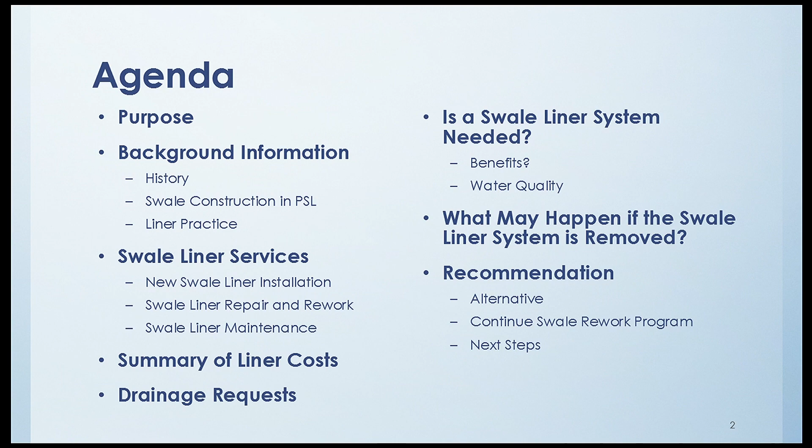I'm going to go over an agenda and explain the purpose of me being here, talking about the background of the program, what services we actually provide as it relates to Swale liner, what those costs are, how that relates to drainage requests, whether it's needed, what happens if we remove the program, and the recommendation moving forward.

The purpose is basically twofold. You requested staff to look at this at the winter retreat when the master plan was presented to you, and you also asked staff to look at it again when the stormwater utility fees were presented at the summer retreat in 2021.

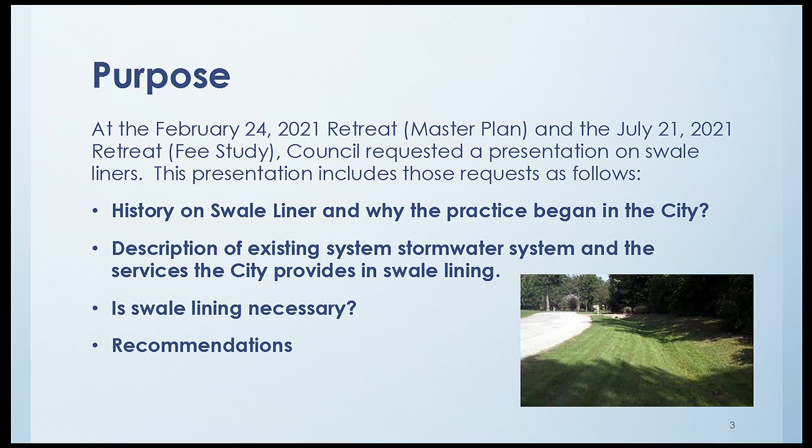A little history on the Swale liners, which was one of the requests at those retreats: as we know, the city was incorporated in 1961 as part of a General Development Corporation large land purchase. But from 1961 to 1988, we didn't really have an effective public works department - we lacked some manpower and equipment. GDC also prepared a stormwater master plan.

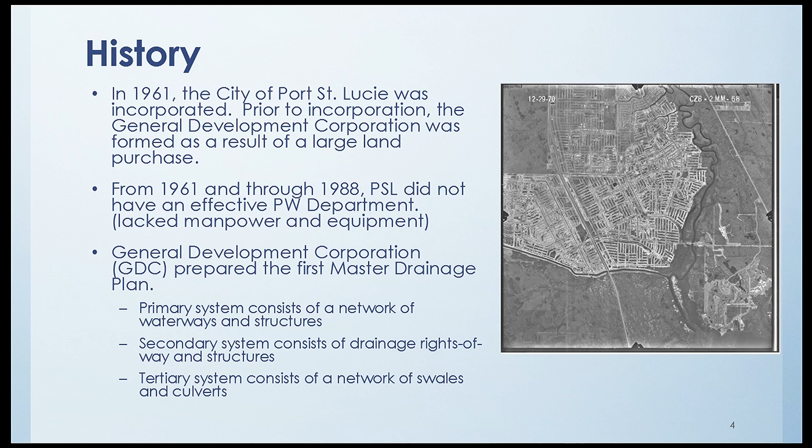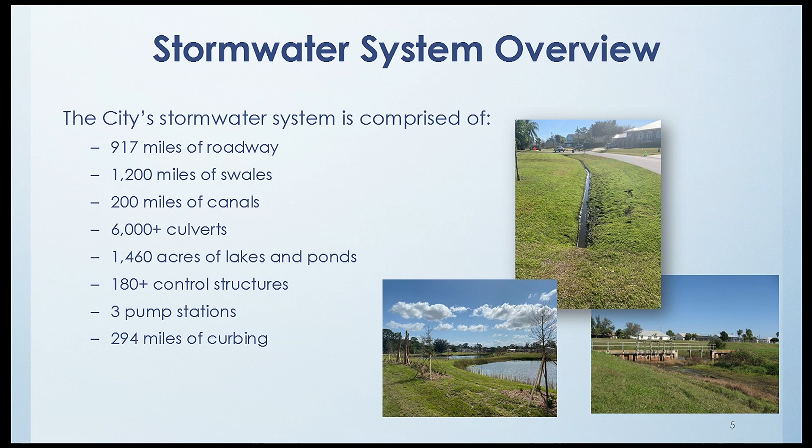Our stormwater system is comprised of an open system: major waterways, a secondary system of drainage waterways with structures, and a tertiary system that's a network of swales and culverts. It's an open system that includes our roadways, because in bigger events our roads may end up flooding, as we've seen in recent hurricanes. We also have swales, canals, culverts, lakes and ponds, structures, pump stations, and curbing to convey stormwater. But today we're going to concentrate on those swales.

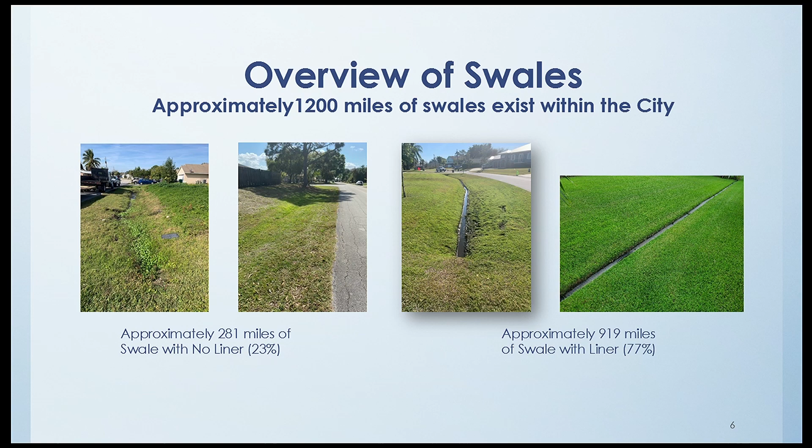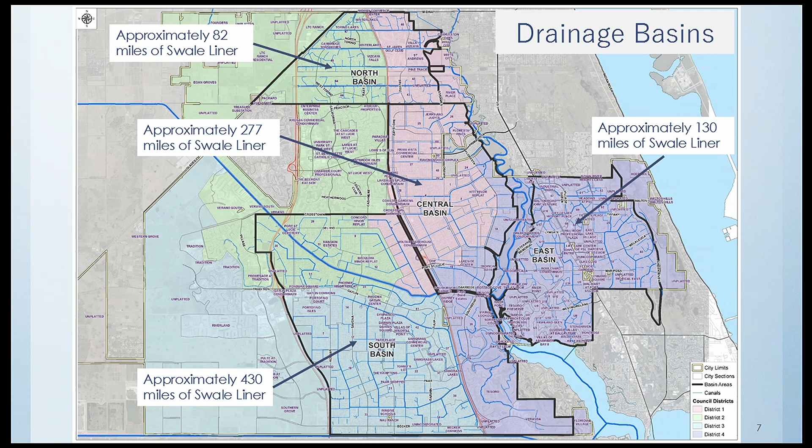We have 1,200 miles of swales in the city, and 281 of those miles currently have no liner - only 23%. 919 of those swales have swale liner, 77%. This map shows where that swale liner is in relationship to our 4 major drainage basins, along with the districts in which that swale liner is located.

I want to give some basics on swale construction, because I really want us to focus on the liner itself. Regardless, we have to deal with the swales - it's our system, it provides conveyance, it provides capacity. But we want to concentrate on the swale liner itself.

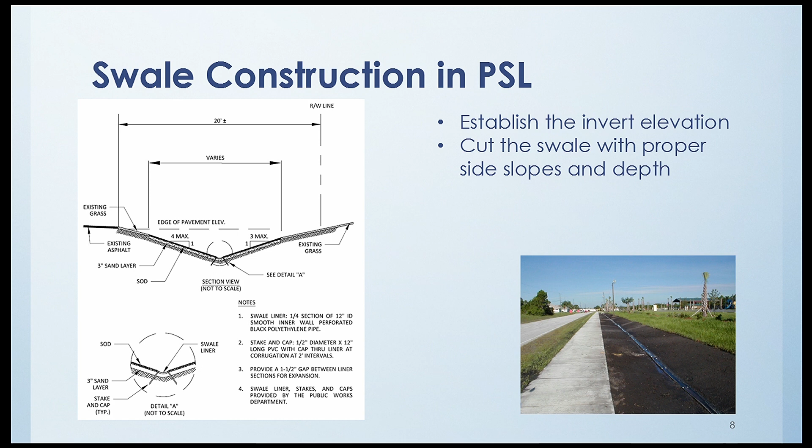This is a cross-section of what we require today as part of swale construction. First we establish an invert elevation, working back from the outfall. We cut the swale with proper side slopes and depth, as shown in this picture. We then add a sand layer for extra percolation, then install the swale liner, and lastly we sod it so we don't have erosion of the sediment. Again, concentrate on the installation of swale liner, because regardless, all those other steps have to occur when reworking or constructing a swale.

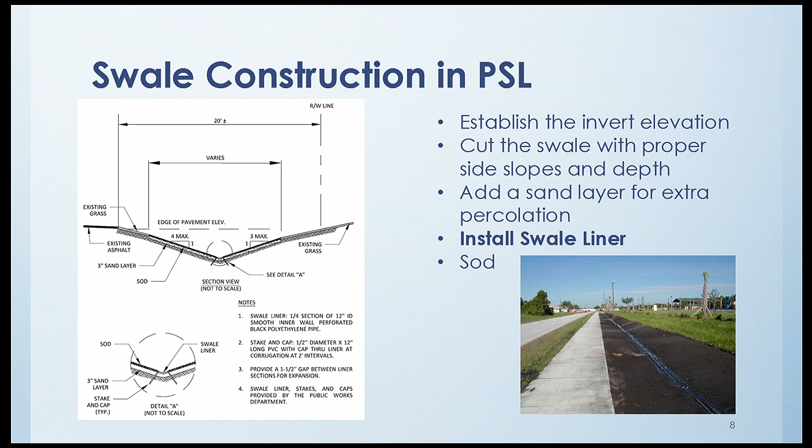The liner practice was initially started in 1987 as a result of the water and sewer expansion in the West, and as part of a drainage rework program, because there were a lot of complaints about flooding in the roads, as well as issues when constructing water and sewer where some swales weren't coming back as they should. If you think about it, 1987 is about 20 years after Port St. Lucie was developed - about the right time to do something about your swales, because you have a lot of sediment. It's kind of coincidental that this happened at the same time.

At that time, the city looked at the swale program and thought that constructing swales was going to cost way too much money, that you'd have to maintain it every 3 to 4 years. Therefore, they thought maybe we should put a swale liner in there so we don't have to maintain it so much. That's why the city adopted that practice back then.

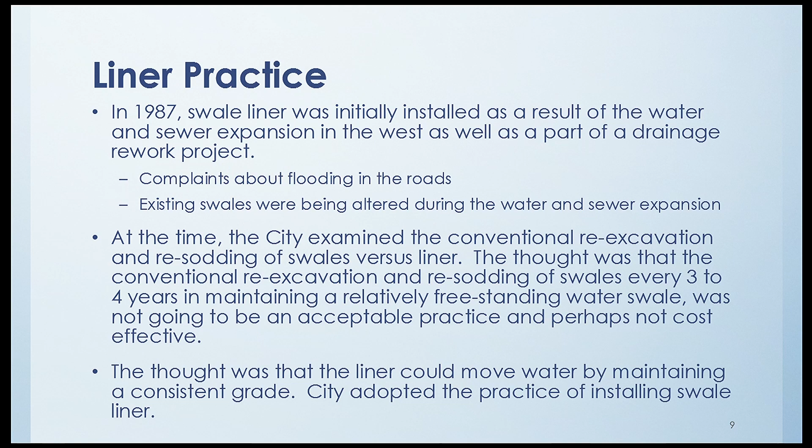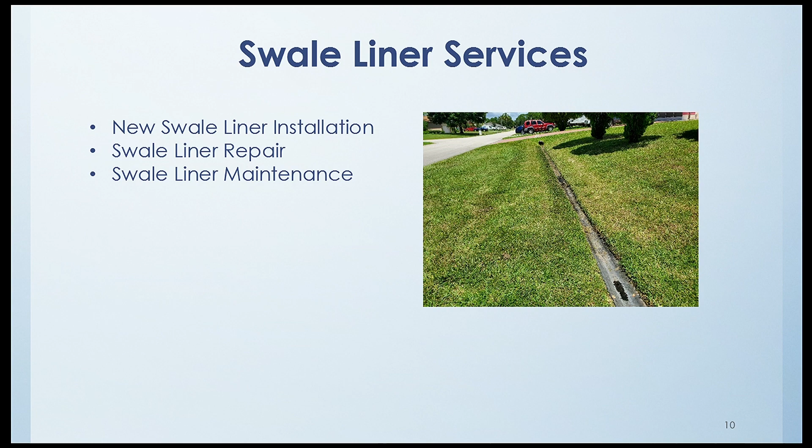The city supplies 3 main swale liner services. The first is new swale liner installation, the second is swale liner repair, and the third is swale liner maintenance.

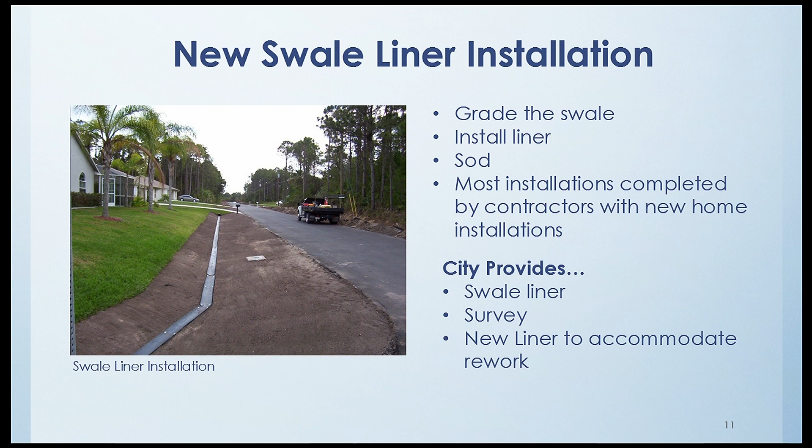The first service, new swale liner installation: we grade the swale, install the liner, and put the sod in. Most installations are done by contractors with new home installation. The city supplies the swale liner, a 12-inch plastic pipe, delivered to Thornhill. Our staff has to cut that pipe because the manufacturer won't cut it for us anymore, usually during overtime hours. We also survey it and make sure any rework upstream or downstream occurs during that time. Again, most of that's done by contractors for builders.

We also have a standard operating procedure. The city distributes the swale liner to contractors. They submit a request online, fill out the form, and notify us when they need the liner. We provide them the liner and the pegs that hold it in place. Our ordinance states that all new construction shall include the installation or reinstallation of the swale liner as required by the permit, so we actually require the swale liner to be installed.

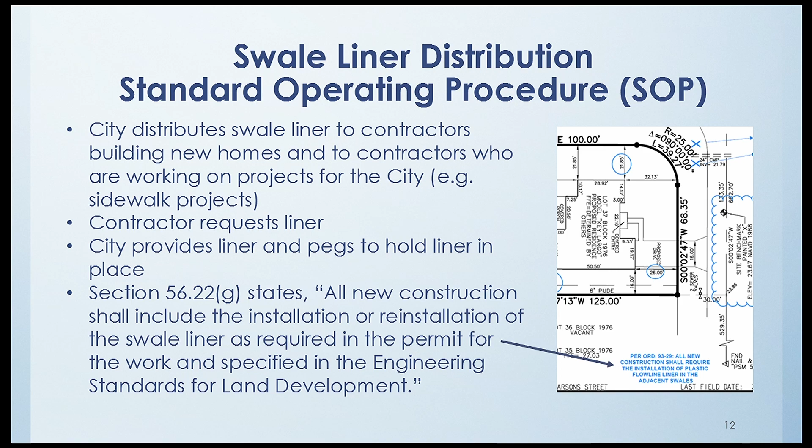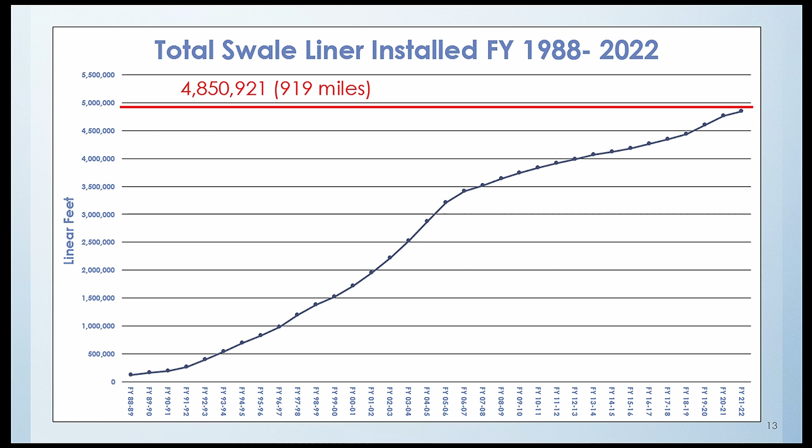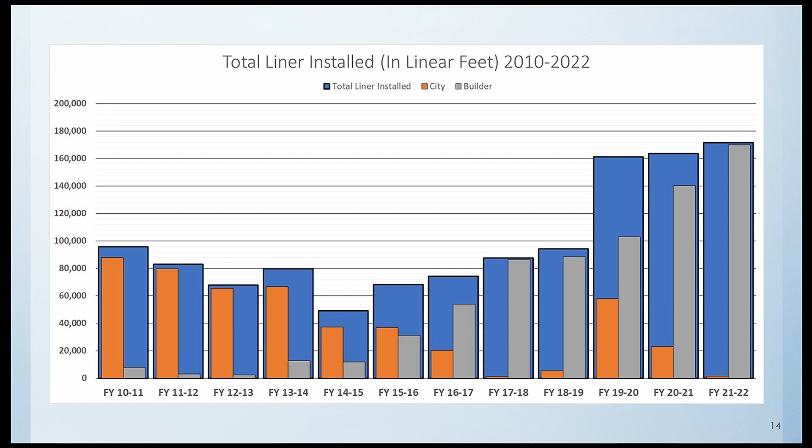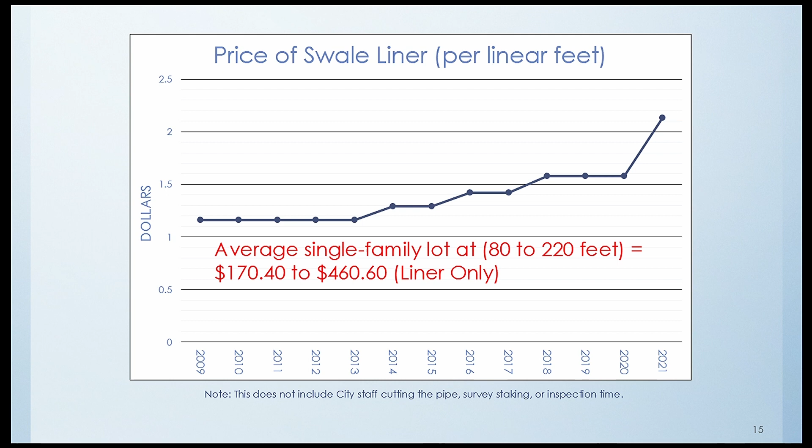The price of swale liner has increased. Right now it's at $2.13, and that's just for the pipe, not including the people who have to cut it. For single family lots with a typical frontage of 80 to 220 feet, we're supplying about $170 to $460 per single family lot just for the pipe.

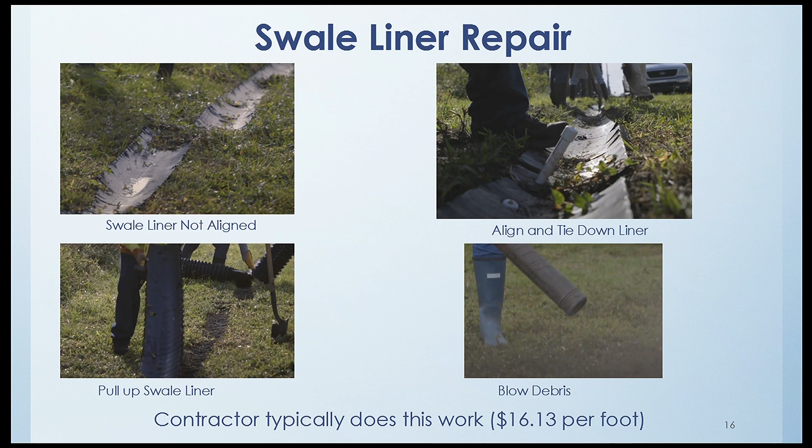This number comes from the Section 19 Swale Rework program approved in February 2021, part of the Innovations project where we looked at decreasing our drainage requests. That project was $2 million approved by council for 48,000 feet. Looking at the program holistically, it's about $41.67 a foot, including grading the swale, pipe rework, grades, and survey. But if we only concentrate on the physical liner itself, that's about $774,000, which is 39% of that project being strictly swale liner.

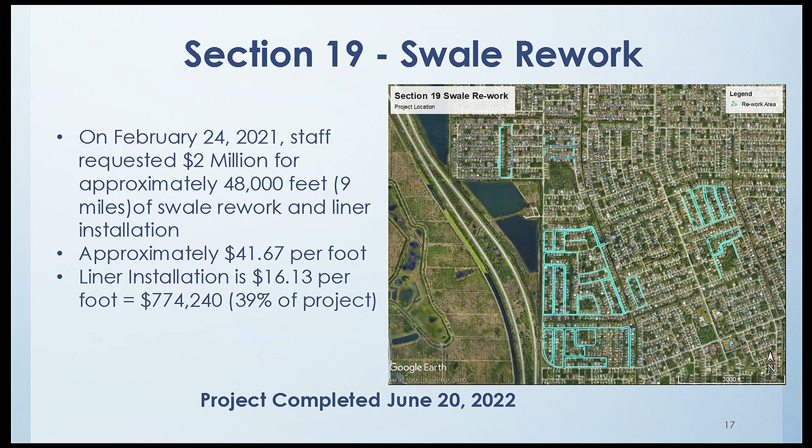The last service the city provides is swale liner maintenance. This maintenance is completed by our current contractors. We provide 6 swale lining cleanings a year. The homeowner is responsible for mowing and removing debris, but we do a supplemental cleaning to help our landowners.

That includes edging the grass, removing the sediment, and blowing the clippings out. If you've seen our swales out there, you see the opening stays clear because all we've been doing is cleaning that swale liner. Our code also states that owners are responsible for cleaning out those swales, removing the silt, litter, and debris.

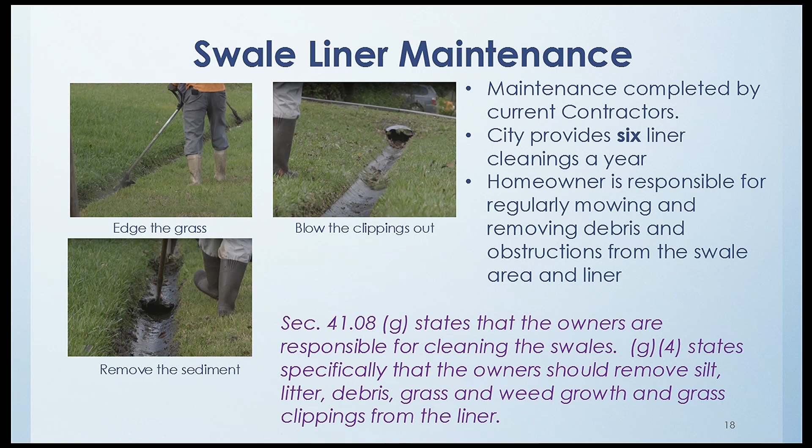The swale liner maintenance areas are split into Area A and B. Those contracts were working off the 2016-2017 contracts, which were $1.6 million. Our most recent contracts are now $2.4 million, so we've experienced a $742,000 increase in swale maintenance alone.

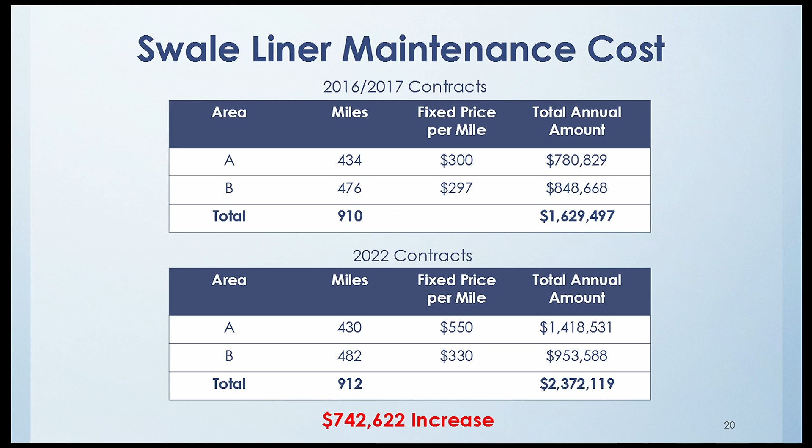So if I was to summarize all the costs for the liner, and keep in mind, this is probably really conservative—there's probably more cost when we talk about city labor and reworking swales. New installation, based off the home growth we've seen in the past 2 years, would be about $350,000. The repair, based off just Section 19 last year, was $774,000, and that doesn't include any small city maintenance repairs we've done. The maintenance of the swale liner itself is about $2.4 million. So we're looking at $3.5 million just for the liner, which is about 10% of the stormwater budget.

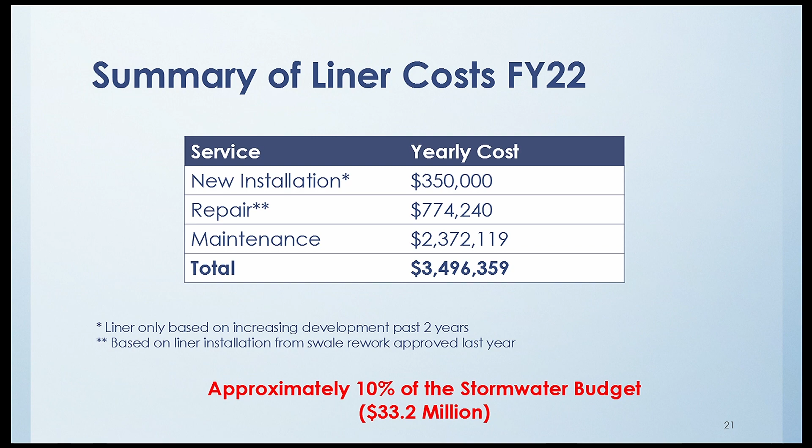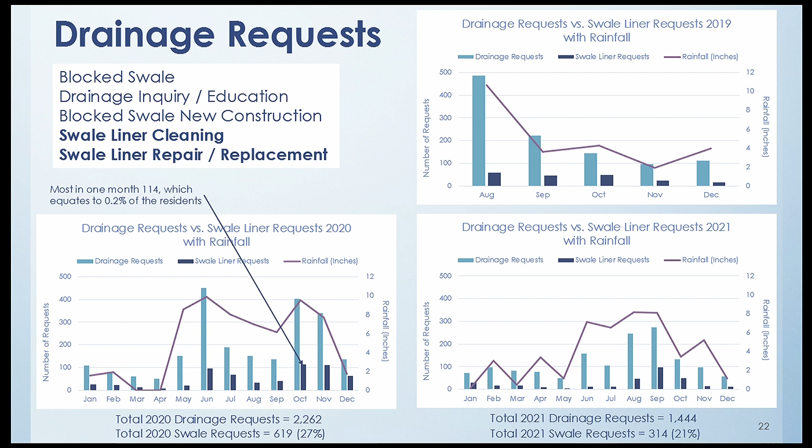As you see, these are the drainage requests. I've plotted them with rainfall, so we know we get drainage requests when it rains—that's when people finally notice our swale system and stormwater. I've also taken out the requests that are strictly swale liner cleaning and repair. Sometimes it's a quarter of the requests, sometimes a third, sometimes not much. But the main takeaway is when it rains, we get a lot of requests. The swale liner requests aren't as much as all the other requests, like blocked swales and drainage inquiries. Even some of these swale liner cleaning requests aren't exactly related to swale lining cleaning—it's just how they get coded.

So is the system needed? I've done a lot of research and a lot of work in the state of Florida, and I could find one city that was using it—the city of Sebastian. They stopped the program in 2016 because it cost too much. So right now, there's no other municipalities that I know of that actually use plastic liner for drainage. From an engineering standpoint, swale lining or ditch lining is basically for erosion—not for conveyance, not for storage. It's just to help reduce sediment erosion, and it's only needed when erosion occurs greater than about 2 feet per second.

Plastic pipe is not in any engineering standard for swale lining. I also wanted to note that according to FDOT, regular sod handles 4 feet per second, and our slopes for our swales are so shallow we wouldn't even see that kind of velocity. So from an erosion standpoint, we really won't see erosion to where it would warrant having swale liners. Now, it may be dependent if some of our soils in the city are less resistant to it—we could probably entertain something like that. But for the most part, you see them on I-95 where you have steep slopes coming off bridges.

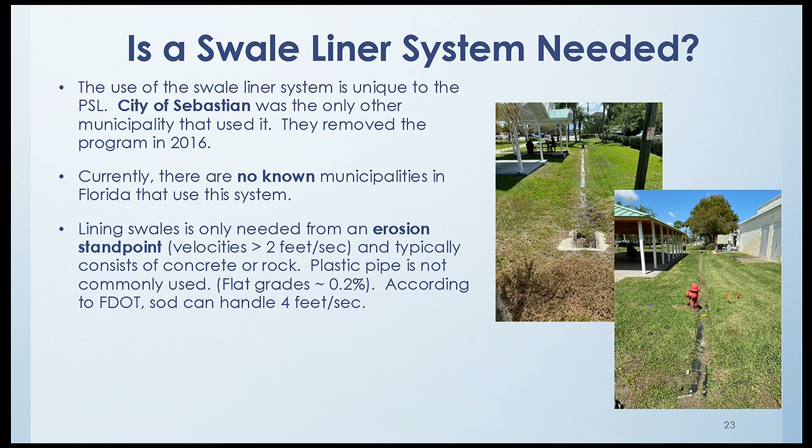So again, the one thing the swale liner does is preserve the grade, because we're going from pipe to pipe and producing that plastic transition. So we're doing that, but is it necessary? Maybe, maybe not. But that is one positive to it.

We're also seeing a lot more pollutants and sediment getting into our secondary and primary system, because if you think about it, a majority of our storms are less than 2 inches. If we have a lot of lawn debris, grass clippings, and sediment from just regular everyday activity, that sediment goes straight into our main system with the swale liner. And if you haven't noticed, at the end of those big pipes into our drainage canals, you'll see little sandbars—that's where all that is just coming out and collecting. So it's getting into our main system, which also means more maintenance for us.

Also, it's not infiltrating into the ground. If you had the grass clippings and sediment without that swale liner, it would actually allow a lot of that to settle, and it wouldn't come off the swale so fast. Another thing is in our public works beautification policy, we actually promote native vegetation in our drainage swales instead of using liner.

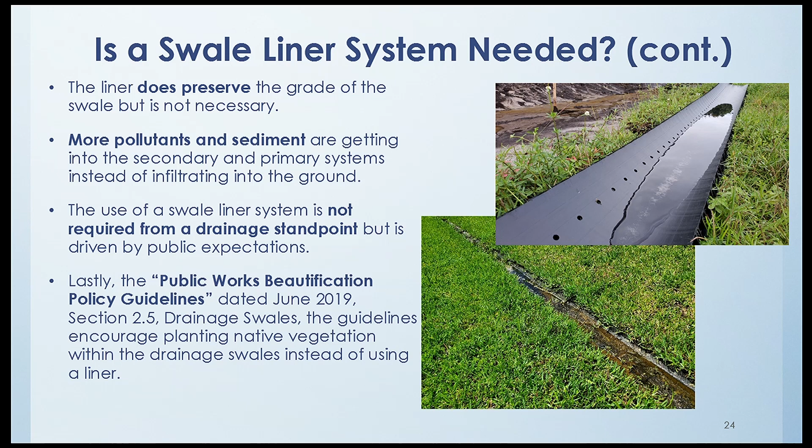The only benefit I, as an engineer, see is maintaining a grade. But the disadvantage is a decrease in water quality. Those lawn clippings are getting into our swale system, along with sediment. The cost is 10% of our budget. And then you have a decrease in flow capacity.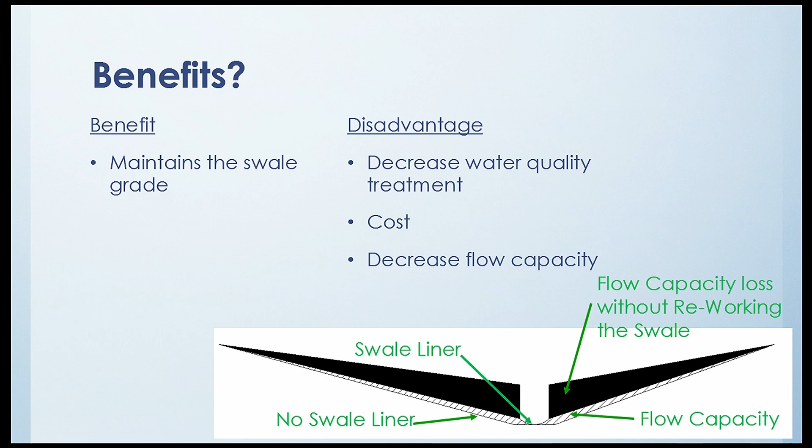If you were to remove the swale liner, which is this little quarter of a circle, you would gain this much flow capacity from having almost a 1-foot bottom in the swale. The swale liner itself is only about 8.5 inches, and you're gaining a foot. Once we really look into reworking this, we could even go up to a 2-foot bottom to get a bit more capacity. But that may depend, section to section, on how things need to be graded.

I wanted to share with council water quality—I actually did these calcs. South Florida Water Management District basically requires most developers, at a minimum, to provide 1 inch of water quality treatment over the entire area. Based on just the swale liner itself, we're not getting about half an inch of that treatment because it's not hitting the ground, not going into the soil to be infiltrated—it's just running off. Part of our goals, goal 5 in our strategic plan, is high quality infrastructure and facilities, so we really do want to improve that water quality.

I share this graph to the side because the Florida Stormwater Association did a study on grass clippings, and they found grass clippings had more fecal coliform in them than dog feces going in—yeah, exactly—and also the sediment. It was really interesting how they did that. But with the other graph, what you see is we're missing out on that infiltration by having the swale liner. I personally, last week, was driving around and noticed water in the swales, but it was in the plastic liner and not in the swales without the plastic liner. Those were pretty dry.

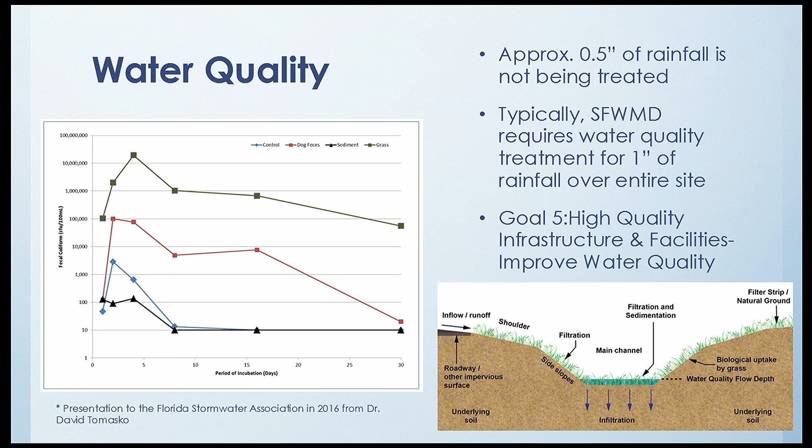So what would happen if the swale liner system was removed? I feel the city would incur minimal cost to remove the liner if we implemented it as part of a swale rework program. So I wouldn't advise going out and ripping it all out—I'd say we need a systematic way of reworking our swales so we could get the most benefit out of that system.

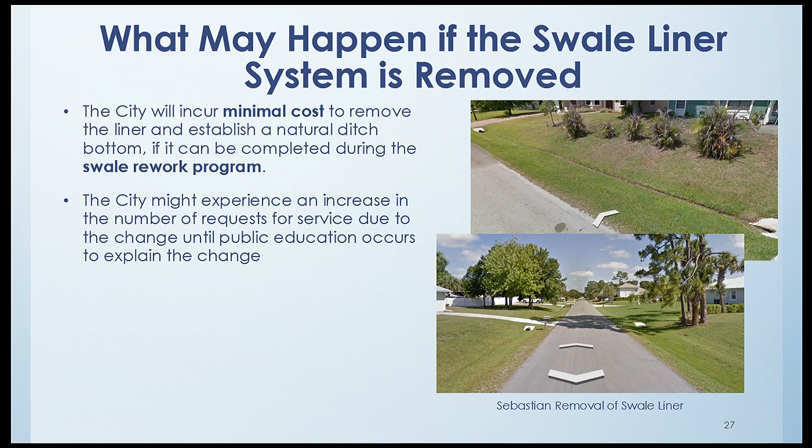We might also experience some increase in calls because people are used to seeing the swale liner, and it's a change out here. So until we can really educate the public and explain that change, we may see more calls initially, but they should go down over time.

My recommendation to council would be to phase out the swale liner program—it's about $3.5 million. But in order to do that, we need to change the code, because right now we require people to put swale liner in. I'd also recommend canceling the swale liner maintenance and installation contracts, and that we don't order any more swale liner materials. We would only remove the liner when we do a swale rework program, because at that time, the customer will see a benefit in what we're doing—we're adding capacity and improving infiltration.

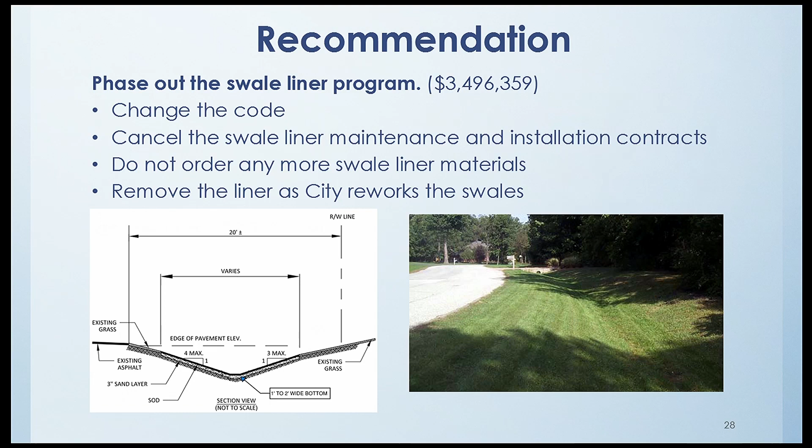As an alternative, if phasing out the swale liner program is not your cup of tea, we would recommend removing the maintenance program, which would be about $2.4 million, because right now there's no change in the code—the code actually requires landowners to take care of their swales.

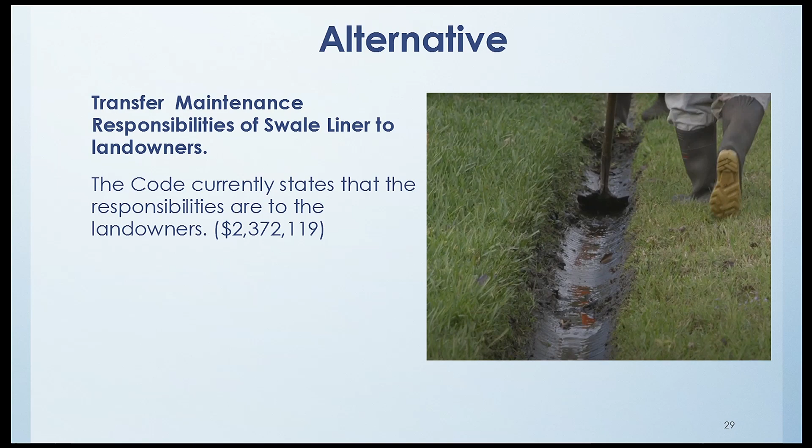After all this that I've said, regardless of whatever happens here, we definitely need to continue the Rework program. You guys funded $2 million in February, and it needs to keep going. Our master plan identifies the need for it. We know that reworking the swales will remove sediment buildup, and maintenance for these swales, even with or without the liner, should be 5 to 20 years. The Florida Department of Environmental Protection is currently changing standards and regulations to require municipalities to maintain their swales more often.

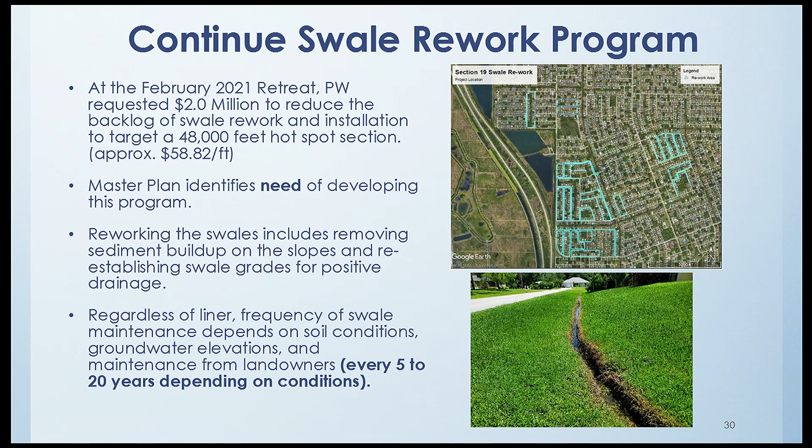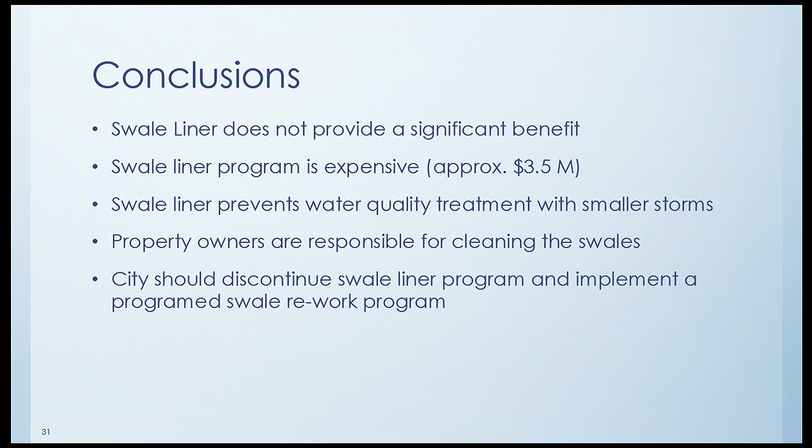So I'm concluding that the swale liner doesn't provide a significant benefit. The swale liner program is expensive. The swale liner prevents water quality treatment from the smaller, more frequent storms, which is very crucial to our environment. Property owners are responsible for cleaning their swales, and the city should discontinue the program and implement a rework program.

So the path forward: should council give us direction, we would approve a recommended path forward. We'd have to come back to you for a resolution, since we're just talking about the program. We'd also have to provide notice to the pipe vendor, cancel all future purchases of the liner, and cancel the swale liner maintenance contracts, which actually require 60 days notice.

We'd need to prepare a draft ordinance change since this is in our ordinance. So in order for us to move forward, we'd have to change the ordinance. We're thinking 3 months, up to 3 months for that, then 3 to 9 months to adopt the ordinance.

We'd send notices to those property owners that have requested a swale liner. According to our OnePSL system, we have 356 new liner requests right now, and I'm told by our drainage division that's about 4 years of backlog.

Then, 9 months after, I would evaluate the swale rework program, which is part of our master plan anyway. As part of the direction when I did the CDD rebates, I was supposed to look at the program as a whole and bring back to you the entire cost so that we can do a sufficient rate study that shows what we need to do for the future.

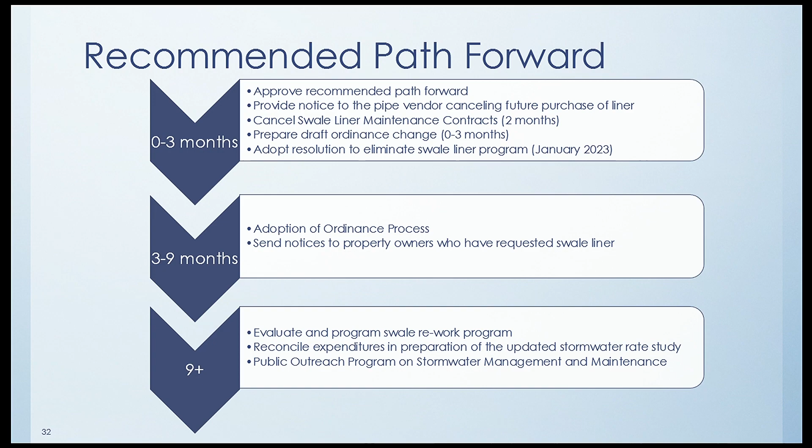So I thank you, and I'll entertain any questions you may have.